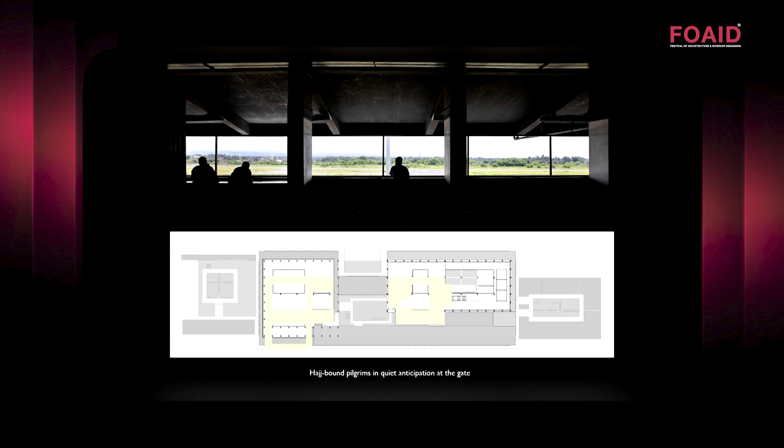The detailing, the screens, the timber work, the idea of courtyards that you find within the airport as you move through them. There's always a gentle breeze blowing around you as you move through the space. And probably this one element was just so sweet: on the first floor, he created these viewing decks. If you remember the viewing galleries of old, where you would wave out to people who were leaving or greet people who were coming.

One of the other major functions of this airport was to allow the Muslim community to fly out to Hajj, to go to Mecca, which otherwise there would be no direct flight for. So he transformed the lives of people not just by opening up the world, but by allowing them access to one of their most sacred sites. So the airport all of a sudden wasn't just an economic artifact, a piece of infrastructure, but fundamentally was a social project. It was driven by a leader who understood the values that he wanted to keep through the community.

This is an image of these roofs of the Osing tribe, right? So you see that same profile which you find in the houses, the traditional settlements. You can see that same form on the roof, but of course expanded into a large diaphanous element. So here, in section, you can see how the roof gently floats above both the departure and the arrival halls.

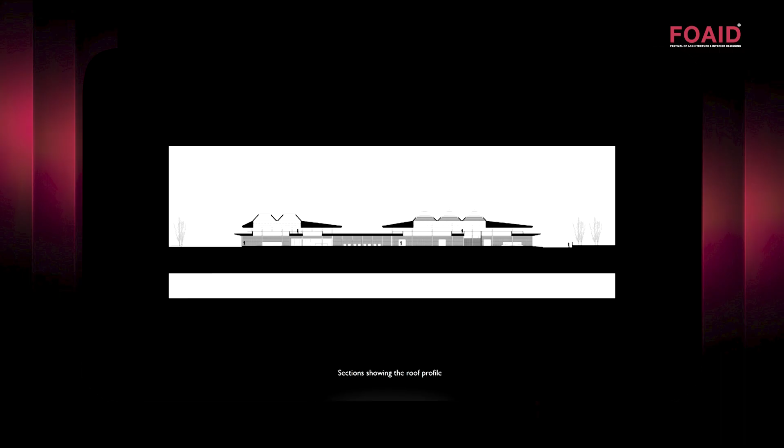So incredibly elegant, incredibly simple. It's not an airport that's trying to shout out its presence. It beautifully sits in this landscape. And when you see this image, it's so evocative, right? And you can see how, when you're in the interior looking up, this beautiful light percolates in, and it creates this beautiful shade and shadow as you move through the airport.

So it is, in a certain sense, an exquisite piece of architecture, and one which came entirely out of a community-led development, which had incredible people coming together to create, in my view, an exceptional piece of architecture. Yeah.

The next project that I'd like to show you is at the scale of a small township. In 2011, I think, we won a competition. This was for the Shrimad Rajchandra Mission, which is an ashram, where a very dynamic leader, Rakesh Bhai, is trying to bring Jainism to the youth, to reimagine it, to reinvent it, to draw young people in and have them begin to understand and practice the ideas of Jainism, but within a whole new format.

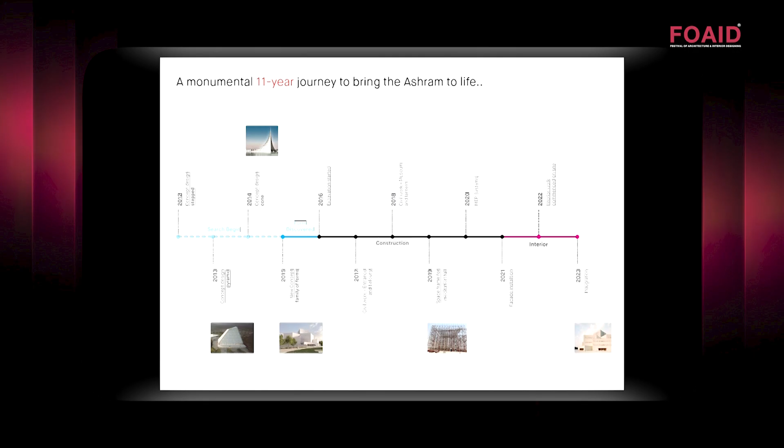And we got to a point where we were no longer even calculating man hours, right? We did a rough math: maybe 600 site visits across 11 years, maybe 2,500, 3,000 drawings. So you get to a point where you're just motivated because there is a much larger idea, a much larger goal, there is no commercial interest, there is aspiration. And as an architect, to be able to bring all of this together, but also work with this incredibly dynamic group of people.

I mean, not to romanticize this, but it's such a beautiful word, seva, right? That you will do because you want to serve. And that spirit has imbued this project from the day we started it. And that is really what allowed us to do what we do. That's me and my partner, Chris.

When we first visited the site in 2011, it was an incredible visit. We were just getting to know one another. But subsequently, this is how we would have our meetings, right? And over the years, we went from a client-consultant relationship to collaborators and eventually friends and compatriots. I think the evolution of that relationship was so beautiful. As architects, we don't talk about this. We don't talk about the beauty of our relationships, what we get over and above professional recognition.

I mean, what is that? You won an award today or yesterday, it's news tomorrow. People don't remember. But what we carry with us are those friendships and relationships, and those will last you a lifetime. This is, of course, the staff at Serie. Over 15 years, people came, people left, everyone contributed. This sense of collective ownership is something so special.

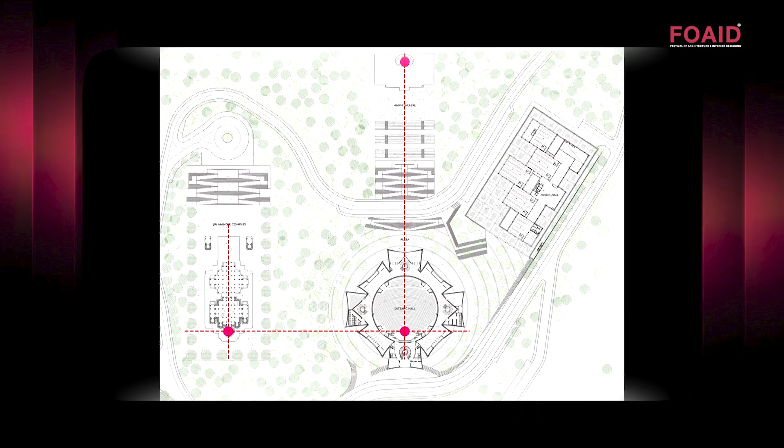The plan of the Satsang Hall, again, is very interesting. You don't do circular auditoriums. Why? They're just acoustically poor, right? But the Guru said, how can you bring 5,000 people close to me? I want to feel people. I want them to be close to me. And I think the circle really was the most effective form that allowed us to bring the audience as close to the Guru as is actually possible.

So this is an image of the building as it was actually completed. And I'll just talk about the structure. So what is interesting is this mandala-like form is essentially entirely structural. So what you have is form that steps up to an actual central volume, but at the same time is about aggregation. So it is about the rotation of self-similar walls or volumes which keep rotating 45 degrees as you go from one tier to the other.

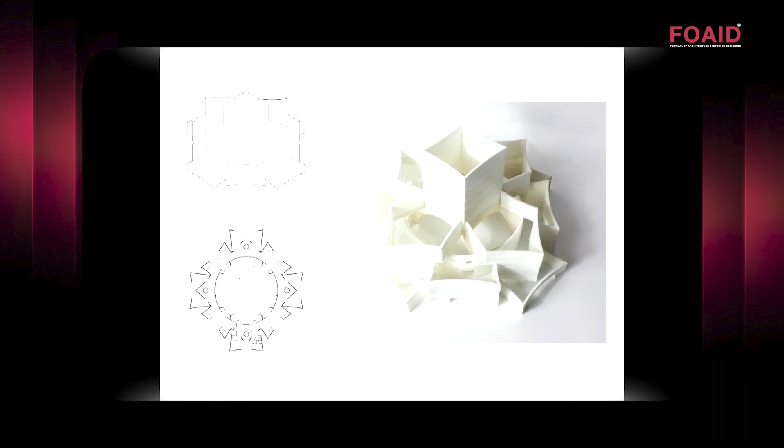So it's an aggregation of basically 13 volumes, all of which hold the various programs that we had to place around the actual main auditorium. What is interesting is if you see the box in the middle is actually held by the structure below, which is how we managed to create this very, very large span format. So this is, in a sense, the DNA of the structure.

So 4 large arches that intersect to be able to span 54 meters, but the square in the center that is created by the intersection is essentially where the meditation hall at the top actually caps out. You've got 4 circulation cores on the 4 corners, and you come up to the upper level, that's a balcony, and now you can begin to see the slow rotation of these volumes as you go from one level to the next.

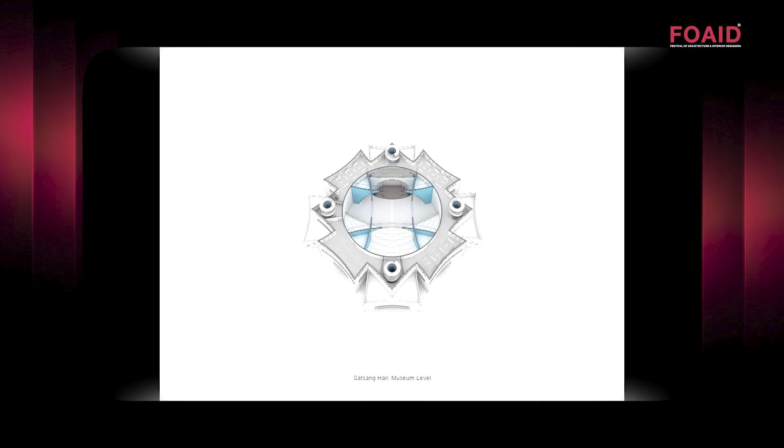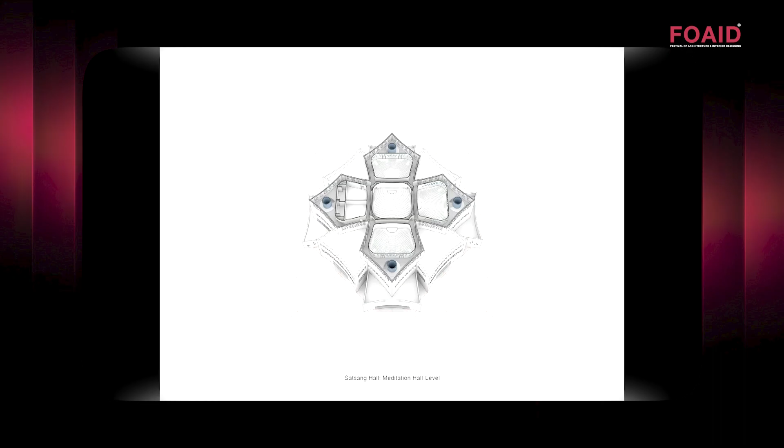This is the museum and the library, and as you keep going up, this is the museum and the actual library. The one below was the actual balcony, and finally the final rotation essentially gives you 4 discourse halls with the meditation hall in the center, which is essentially the crown of the building. Yeah, and yes, it is quite something. The building is completely clad in hand-cut marble. I'll talk a little bit more about it.

But what's quite beautiful is you've got 13 volumes, which means you've got about 35 different faces to the building, which turn away into different directions. So you've got the sun that hits the building from different angles. And I think it just changes through the day as you move around it because it is a symmetrical volume.

And it's just beautiful because everyone's also dressed in white. The building is white. The plaza is white. It's all marble also because it gets very hot, and the marble really allows you to walk across a fairly hot plaza.

But here you can also see the distribution of the circles on the facade, which are calibrated to just bring the right amount of light in, but also not let a lot of heat actually get into the building. So the thermal mass of the structure actually creates very cool interior spaces.

And then here is where you actually enter. There are 8 entrances, so the idea that the building looks out in 8 directions and calls people from all directions. This is the knowledge center, right? So this idea of the building kind of calling out to people.

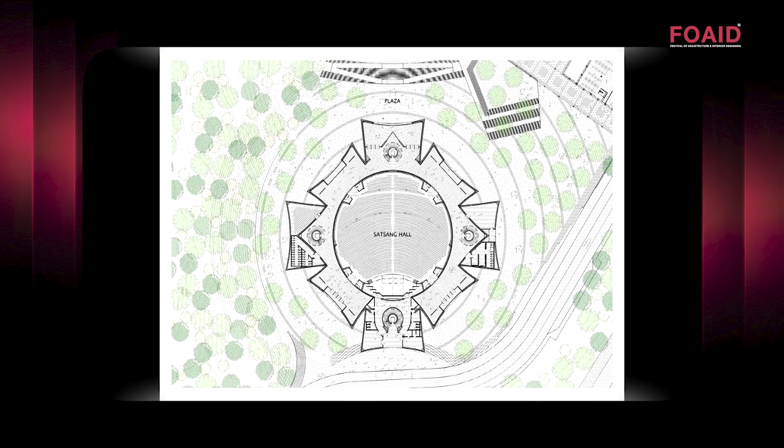So this is just a clearer plan of the Satsang Hall as a whole. And to the south is where you have the main stage, which is actually where the Guru sits. And what is also quite interesting as I move into the interior is that within the main hall, which has the 4 intersecting arches, we needed a large amount of acoustics to make the Guru audible to about 5,000 people.

And this concentric pattern of the acoustic panels, of course, also draws on the sky domes that you would find in Jain temples. And that is the interior with 5,000 people seated.

What's interesting is we only have chair seating in the balconies, whereas on the ground level it's very gently raked, because the point was that the building should be able to be used for various activities and events through the year. So you can see the contrast of the raw RCC structure of the arches to all of the acoustic paneling that is there on the ceiling or on the walls.

And yeah, it's a pretty well-finished building. Again, we believe that with the budget that was finally available to us to build this project, if you try to do this anywhere else in the world, it would probably cost 3 to 4 times as much. So again, just some more images of the actual central hall.

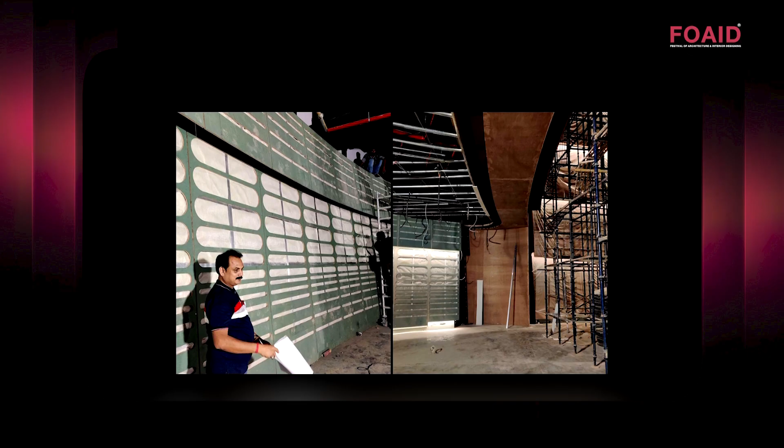And again, talking about people, this is Hanif, and my goodness, he's another saint. He was single-handedly responsible for the entire fit-out of the entire interior, and it was just unbelievable the kind of ownership that he brought to the project. His thinking, his dedication; none of this would have been possible without people like him on our project.

And the Guru and the team were there along the way with us, where every single decision had to have his nod. And that was just fantastic because we had this amazing relationship, where we could slowly see that even the larger team began to think and understood a lot of the design lingo that we would use rather loosely, and they would often throw that back at us.

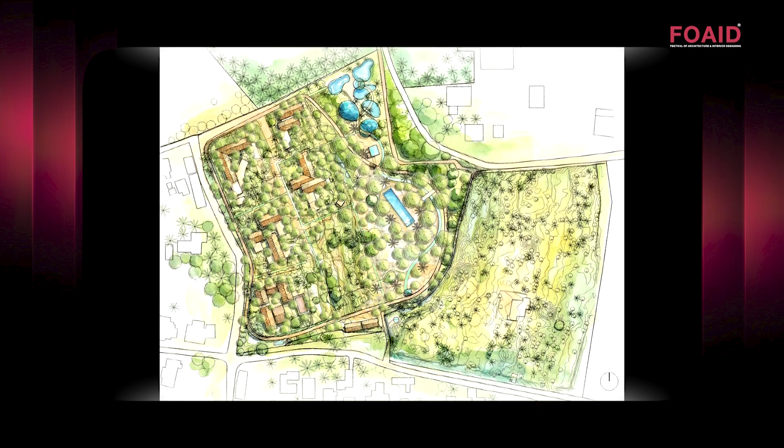And we're building these homes, which will be completely carbon neutral, with earth that's going to be extracted and converted into cold compressed earth blocks, glue lamination for all the timber roofs. And the houses gently float above the ground to release them from the ground plane, to allow for the movement of flora and fauna under our houses.

So guys, this is just a little sneak preview. Maybe in about 2 years' time, I can come back and talk a lot more about this project. But our ambitions are that we want to be off the grid. We should be able to feed ourselves, except for maybe paddy, which is difficult. But finally, what does it really mean to be a self-sustaining community where we are not just residents, but we are actively engaged, not only in each other's lives, but in the ecology and the site itself?